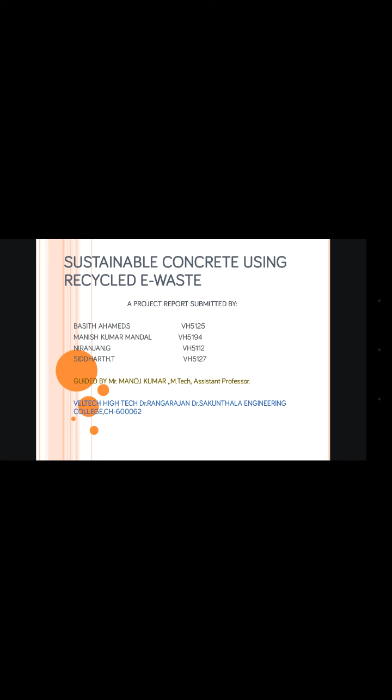E-waste is one of the most growing environmental hazards. As day by day the technology increases, the e-waste generation will also increase. So we have to find some method so that we can easily dispose this e-waste and make some good use of it. The aim of our project is to replace the sand, the fine aggregates, in the concrete with some amount of e-waste, partial replacement of e-waste.

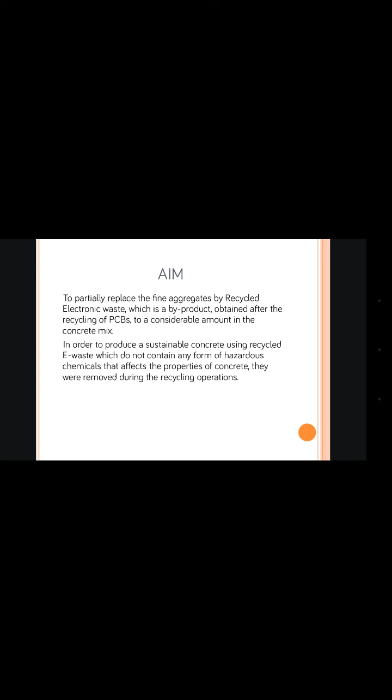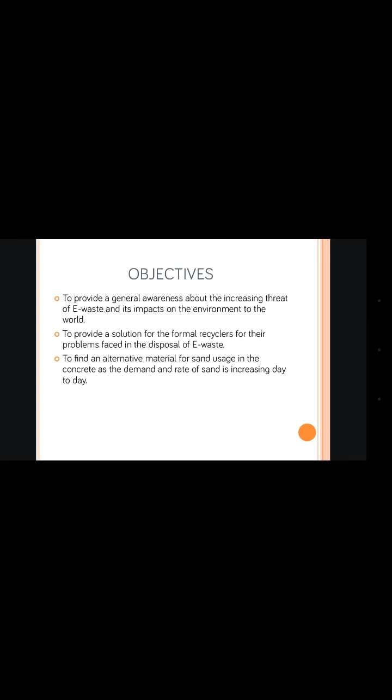The objectives of our project are to provide a general awareness about the increasing threat of e-waste, to provide a solution for the formal recyclers in the way they dispose the e-waste, and to find an alternative material for sand. This is the literature referred from various national and international journals.

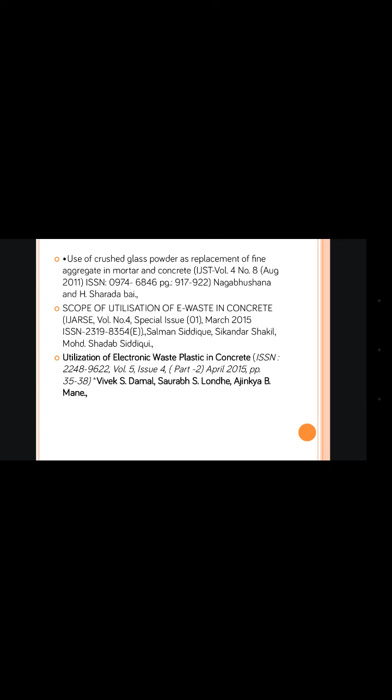Electronic waste, in short, we call e-waste. It is the general name given for any kind of discarded, surplus, obsolete, broken electrical and electronic equipment. They are comprised of electronic devices and household appliances, which we see in everyday life.

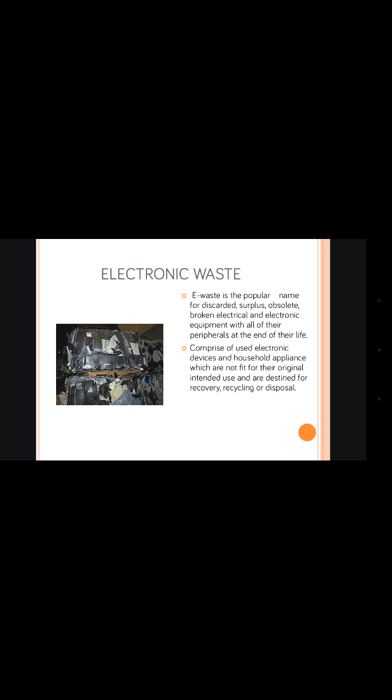The e-waste which we are about to use in this project is printed circuit boards, PCBs. They are present in each and every electronic device ranging from computers to televisions. The main components of PCBs are epoxy resins and glass fibers. But we cannot incorporate PCBs directly into the concrete. We have to make sure that all the harmful components of PCBs like cadmium and beryllium are removed before we incorporate them in concrete. So this is the composition of PCBs.

In any kind of PCBs, this is the percentage distribution of silica, alumina, calcium oxide, and certain amounts of non-ferrous and recyclable materials.

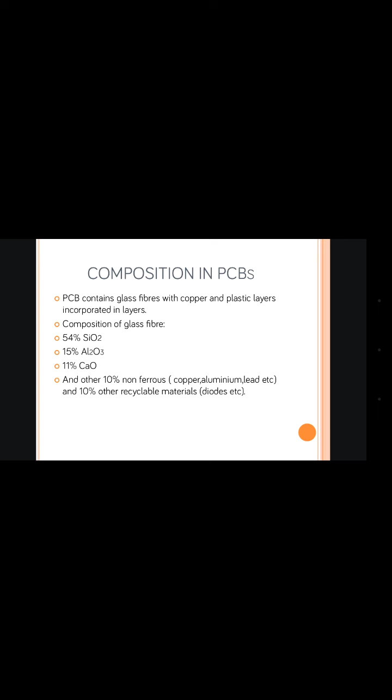So what is the need for recycling of e-waste? As I said before, we cannot directly use e-waste in the concrete because chemicals like beryllium, lead, cadmium, mercury are very hazardous and can create a lot of health impacts. And one more interesting thing is that these chemicals are non-biodegradable, meaning even if we use them in the concrete, they will pose some serious problems to the concrete in future. So they have to be removed.

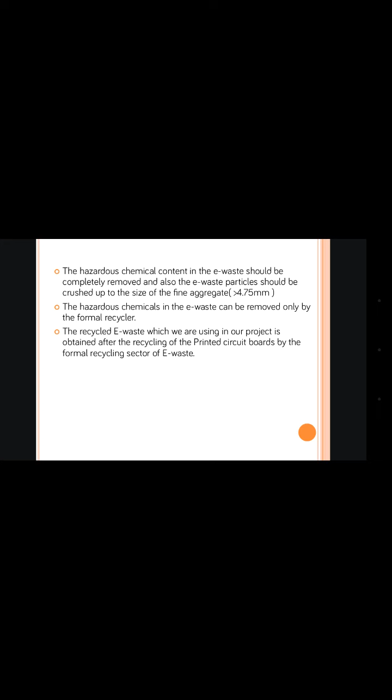The hazardous chemicals in e-waste can be removed only by a formal recycler. In our project, the e-waste which we have obtained is from a formal recycler. Formal sector of e-waste in India: formal sectors are aided and funded by the government to carry out the recycling of e-waste in a legalized manner, using all appropriate techniques and machines to shred and grind the e-waste in a desirable manner. So in our project, we sought e-waste from them.

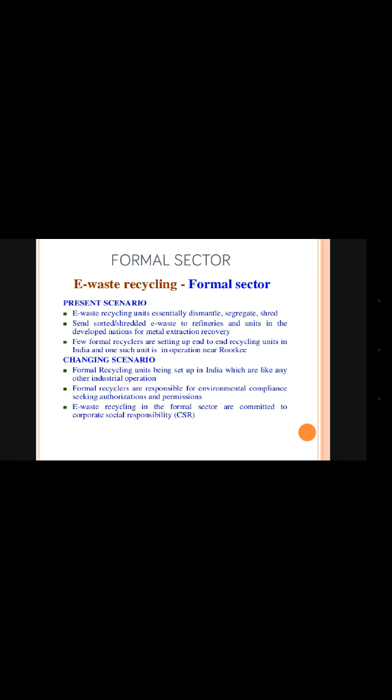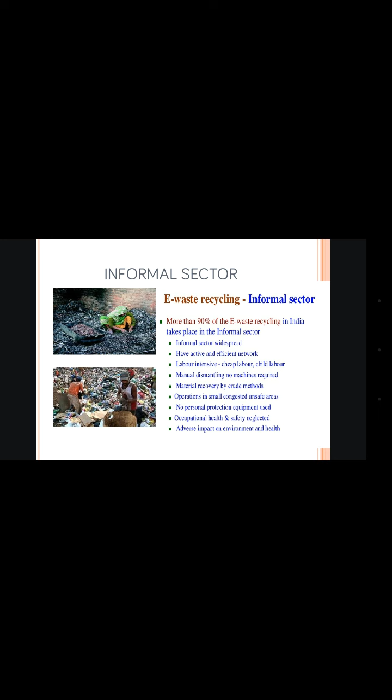On the other hand, informal sectors comprise 90% of e-waste recycling in India. There are very few formal recyclers and many informal sectors. The problem with informal sectors is that they have a lot of health and safety issues. Since recycling of e-waste involves dangerous, harmful chemicals, the workers are prone to a lot of diseases and health hazards, and it is very labor intensive. This even includes child labor, and there are a lot of legal issues in the informal sector. That's why we have not obtained e-waste from the informal sectors.

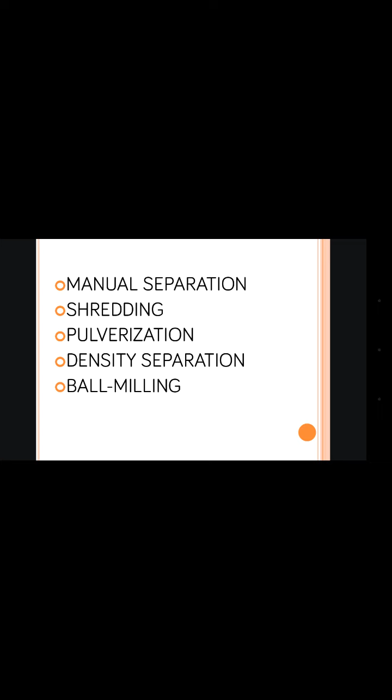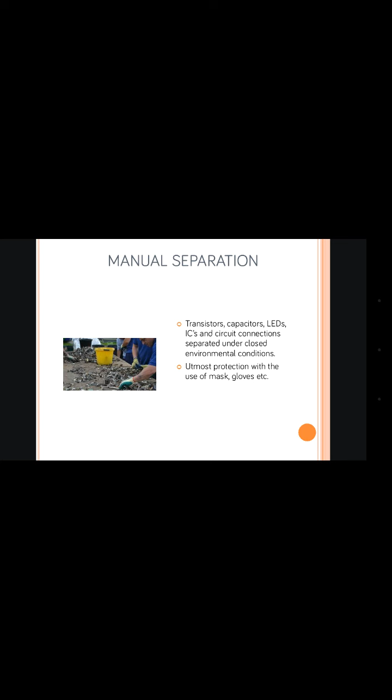Recycling process of printed circuit boards. There are 5 methods: manual separation, shredding, pulverization, density separation, and ball milling. In manual separation, using manual labor, we separate the electronic waste from other components, plastic and metal components. Then they are shredded in a shredding machine. The final output of the shredded particles is about 3 by 3 mm.

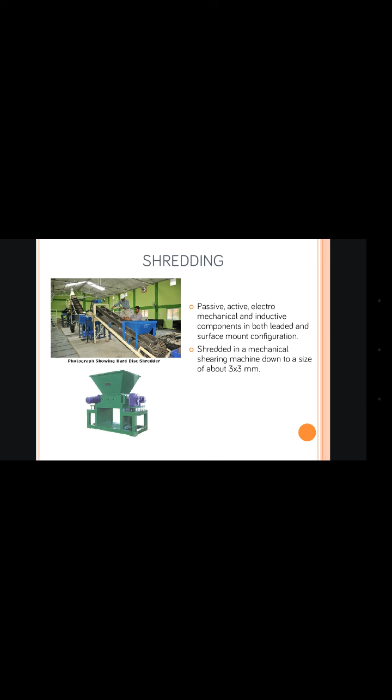The main aim of pulverization is to bring about homogeneity in e-waste. The main aim of ball milling is to activate a reaction between waste and CaO, calcium oxide, breaking down organochlorine compounds. This is done by the collision between the balls inside the ball mill.

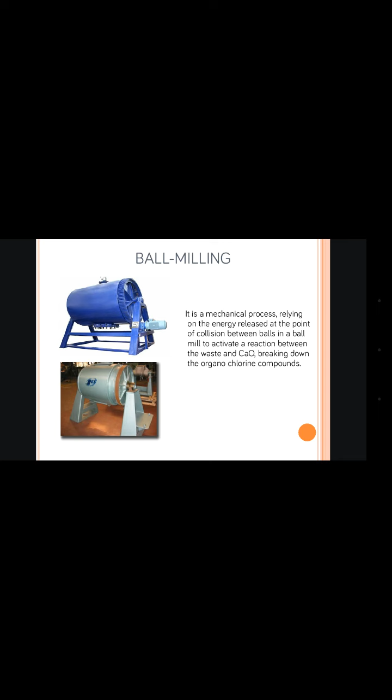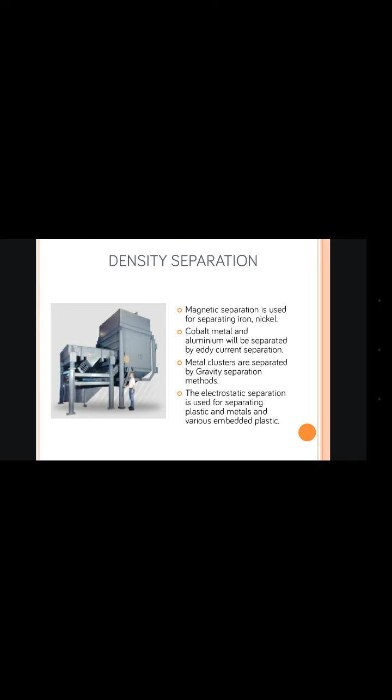Density separation is a very important phase. It is used to separate various kinds of metals and plastics. For example, magnetic separation is used to separate iron and nickel. Eddy current separation is used for cobalt, metal, and aluminium. Gravity separation is used for metal clusters, and to separate plastics from metals, we use electrostatic separation.

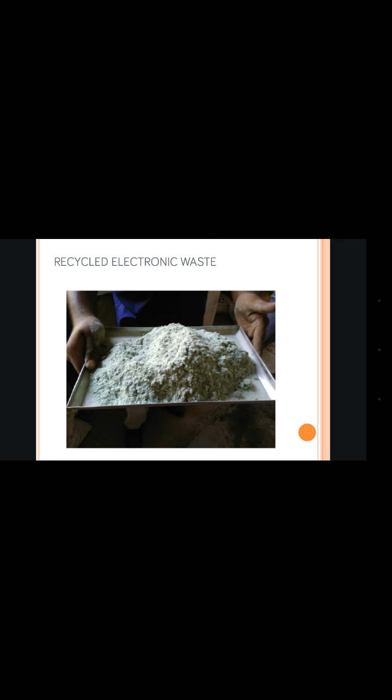So this is the final form of e-waste which we've obtained after removing all kinds of harmful and toxic materials. This is the e-waste which we are going to use in the concrete.

So what is the difference between our project and the previous projects? In previous projects, they used e-waste from informal sectors. But in our case, we use e-waste from formal sectors. The formal sectors are willing to give e-waste for free.

That's the first advantage. The second major advantage of our project is that we don't have any kind of harmful toxic substances. But in previous projects, since they collected e-waste from informal sectors, there will be toxic substances.

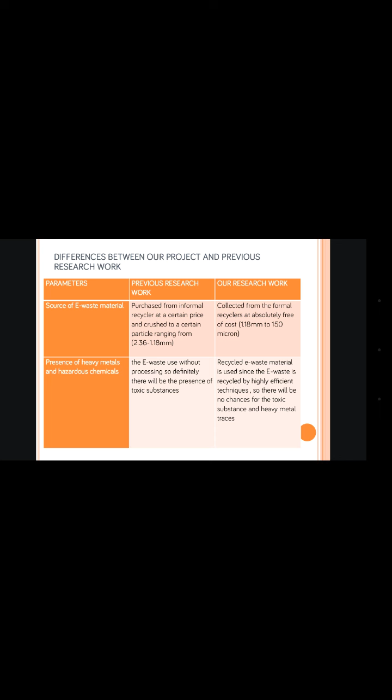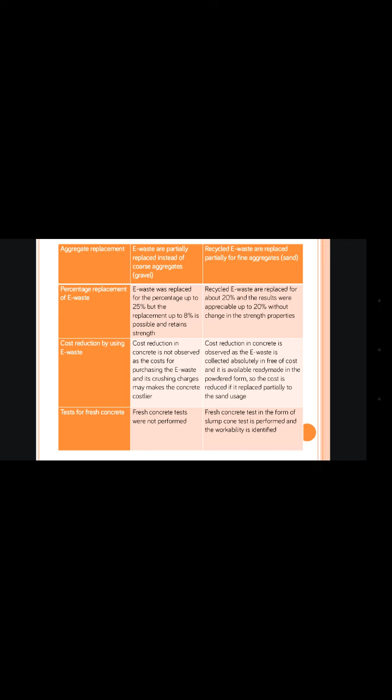Also, the previous projects' main aim was to replace coarse aggregates, gravel, with e-waste. But in our project, we took a completely different approach and tried to replace sand with e-waste. As a result, since we obtain e-waste from formal sectors, the cost is considerably reduced compared to other projects.

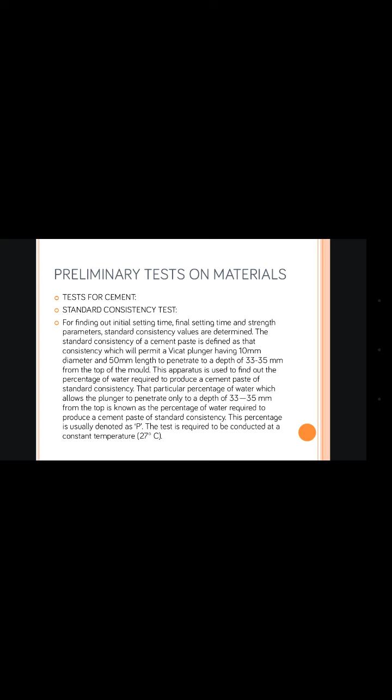To begin the concrete preparation, at any stage, the first important thing is preliminary tests on materials. As per this, the test for cement: the first one is the standard consistency test. The procedure is standard, with 33 to 35 mm depth of plunger, etc.

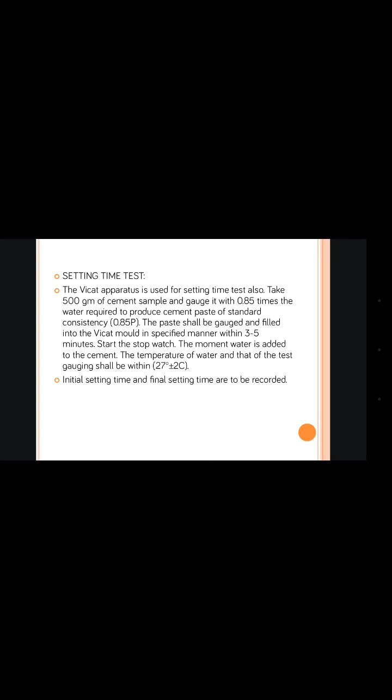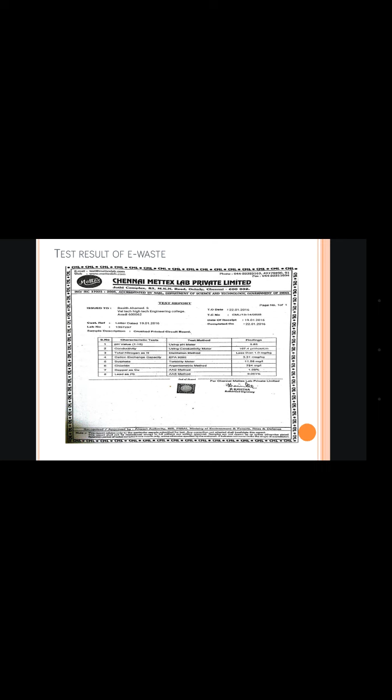This is the test result of e-waste. The e-waste which we obtained was given to Chennai Mettex Lab Private Limited, and by their lab results, it was found that our e-waste was completely free of any toxic and harmful substances. So our project can proceed. This is the main proof that states that the e-waste we use in our project is completely free from all kinds of harmful and toxic substances.

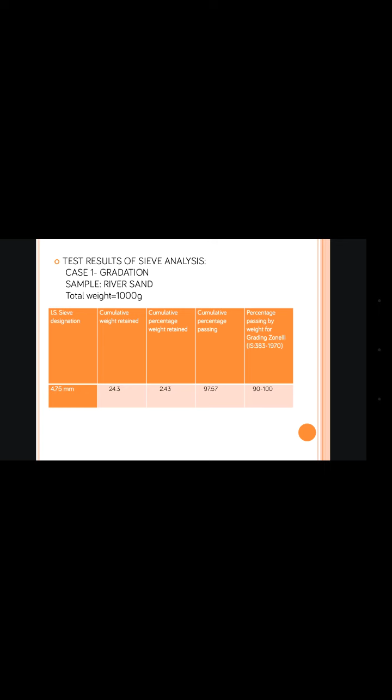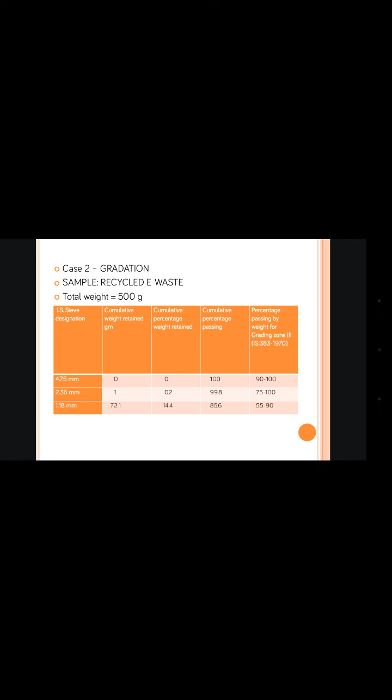The sieve analysis was taken for various cases. The first case was for river sand; the fineness modulus obtained from this is 2.9. The second case, the gradation was taken just for recycled e-waste, and the fineness modulus was about 2.06.

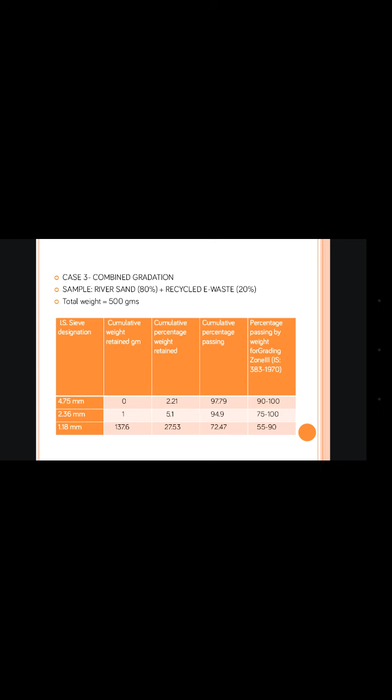The third case, we combined the gradation. We took 80% river sand and 20% recycled e-waste. The reason we took 20% recycled e-waste is that 20% is the maximum percentage of e-waste we're about to incorporate in the concrete, so if the sieve analysis for that percentage is taken, it's more than enough. The combined gradation is about 2.77.

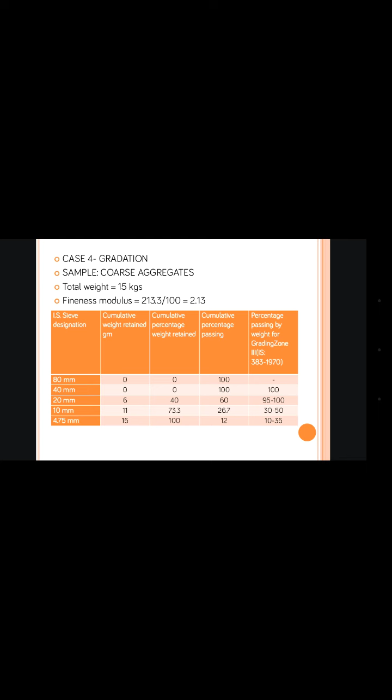Case 4, coarse aggregates, and the fineness modulus obtained was 2.13. The specific gravity tests were carried out as per IS 2386 part 3 of 1963, and the nominal specific gravity of fine aggregates used in concrete ranges from 2.4 to 2.6. The specific gravity is also determined for coarse aggregates separately, for 20 mm and 12.5 mm.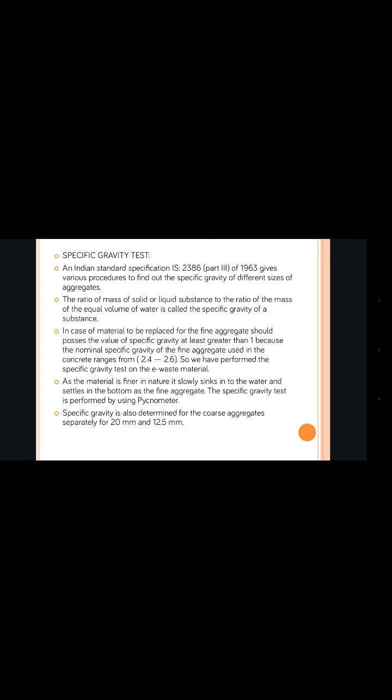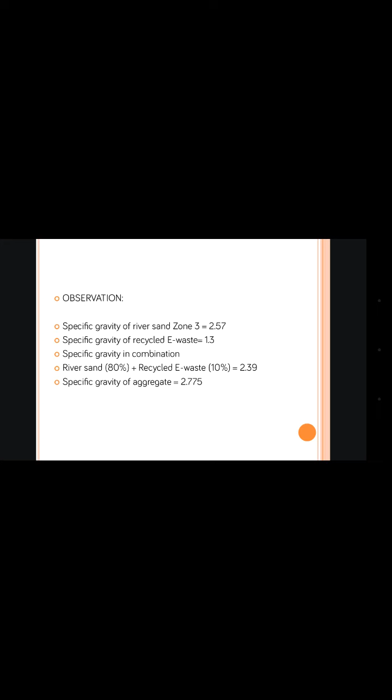As per the observations from the tests, we found the specific gravity of river sand is 2.57, noted as zone 3. Of e-waste, it's 1.3. The combination is 2.39, and the specific gravity of aggregate is 2.775.

Water absorption test is the most common test for coarse aggregates. The observation is that the combination gives about 0.8% water absorption, and water absorption in aggregate is 0.48%. The reason it's more in the combined mix is because e-waste absorbs an extra amount of water.

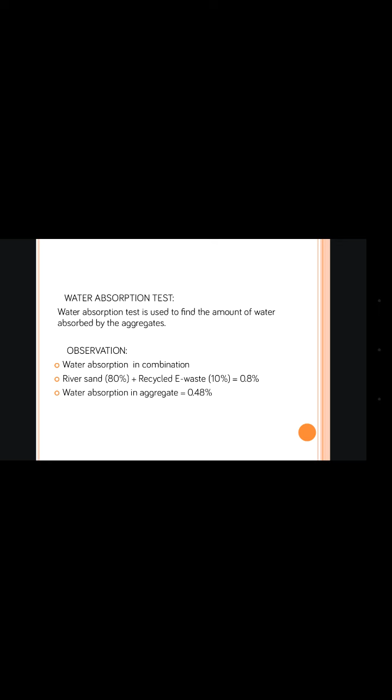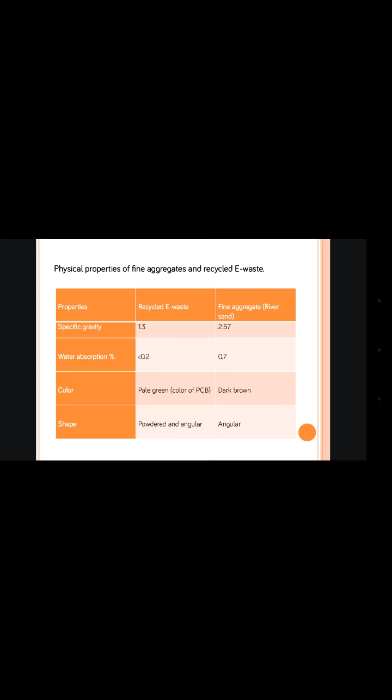The physical properties of fine aggregates and recycled e-waste: this is a comparison to show that e-waste is really compatible with river sand. If e-waste has to replace sand in the concrete, it has to be ensured that the e-waste and sand have almost the same properties so that the project work can be carried out. These are the various property comparisons in tabulated form.

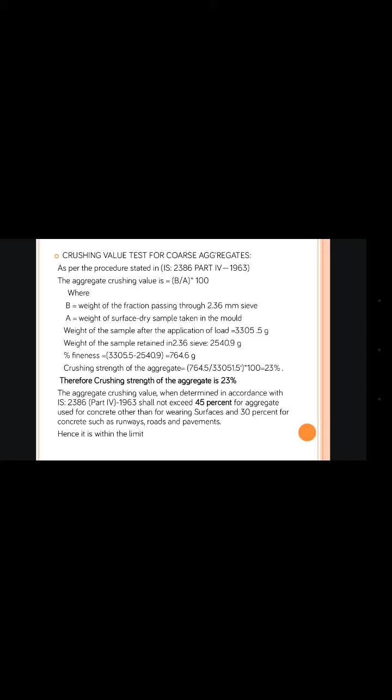Crushing value test for coarse aggregates as per IS 2386. Crushing strength of aggregates, what we found is 23%. As per IS 2386, it is clearly stated that it should not exceed 45%, so our result of 23% is within the limit. Crushing strength of the aggregate is 16.5% in this case.

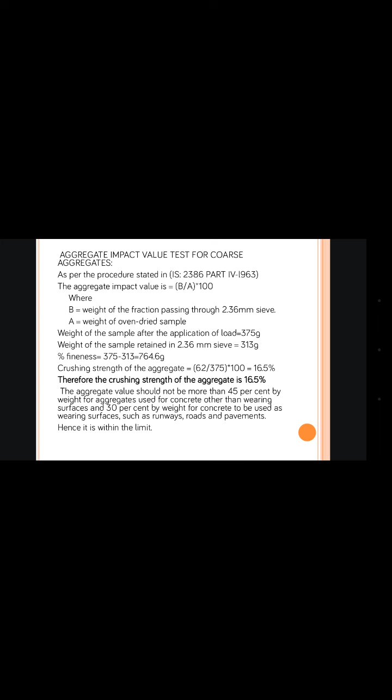This is the most important part, the mix design: manually worked out mix design for M20 concrete. The basic features: cement used is OPC 53 grade, specific gravity of cement is 3.2, water cement ratio maximum level is 0.55, with a range between 0.45 to 0.55.

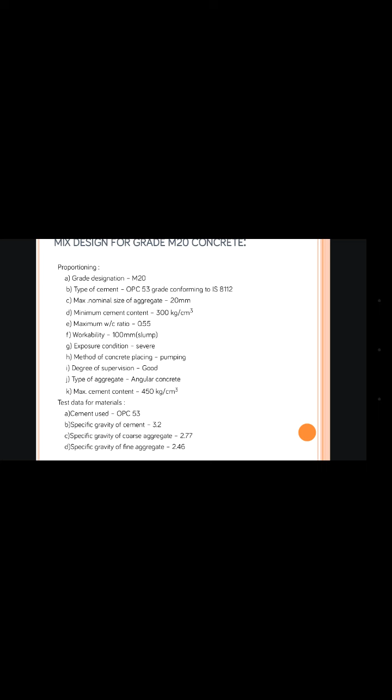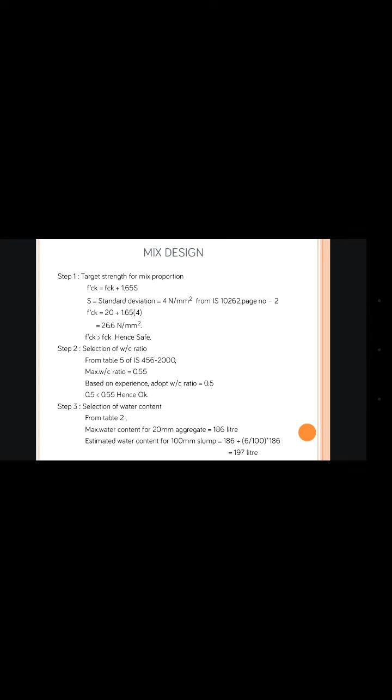The various steps: the first step is to find target strength. The second step is selection of water cement ratio. Step 3 is selection of water content from table 2. All these values which we've obtained in this mix design have been referred from standard code books.

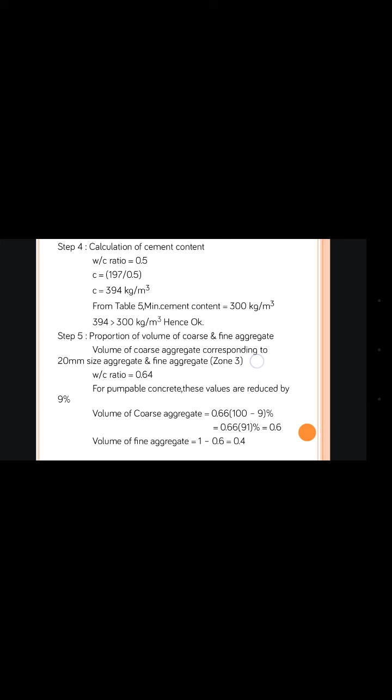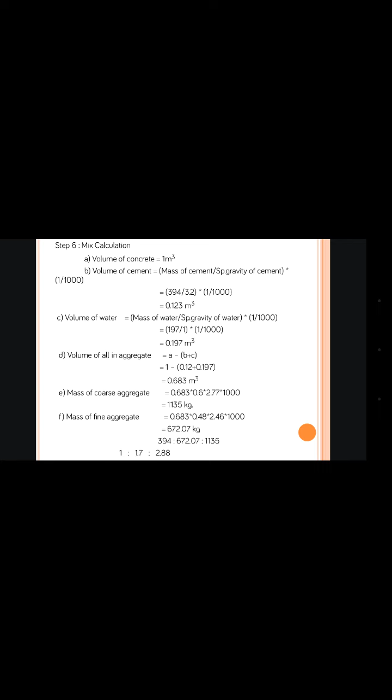Mix calculation. Finally, we arrive at the ratio required for M20 concrete, which is 1:1.7:2.88. We're going to use this mix in our concrete formation.

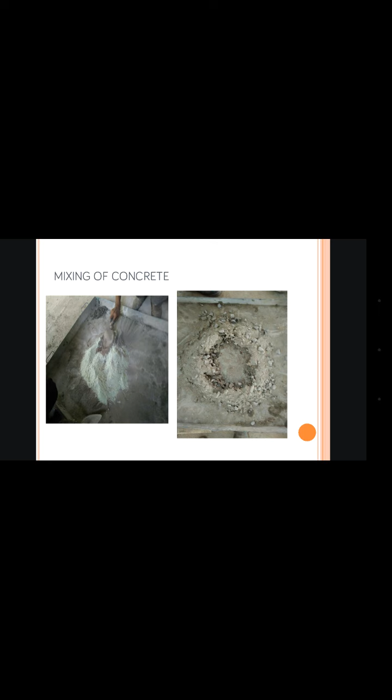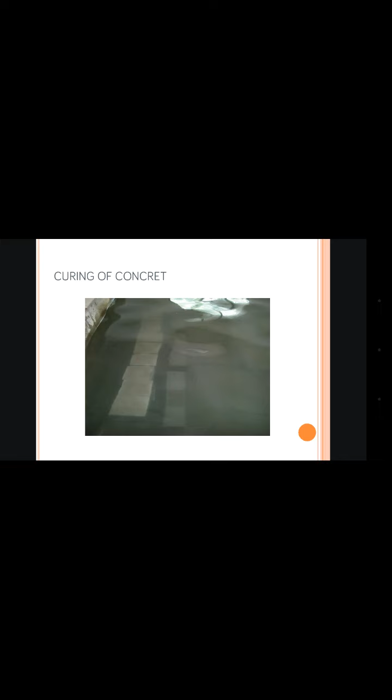After the casting of cubes, the most important test which comes now is the compressive strength test. The compression test is the most commonly conducted test on hardened concrete because it's a very easy test to perform and it's one of the most characteristic features of concrete.

In this project, we adopted replacement ratios of 5, 10, 15, 20 percent, and a standard cube, that is a nominal mix without replacement. For each replacement ratio, we casted 4 cubes: 2 cubes for 14 days curing and another 2 cubes for 28 days curing.

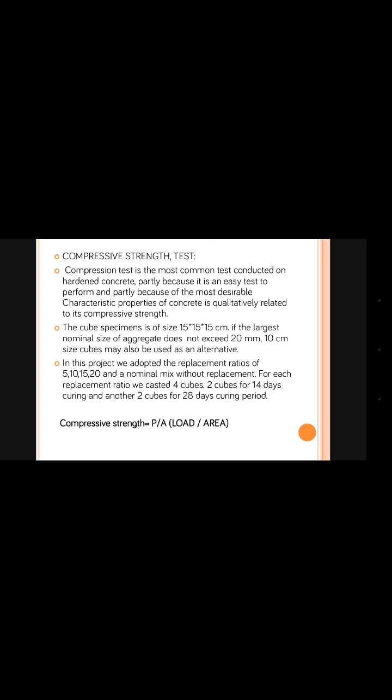So these are the details of the compressive strength test. You can see the 0% replacement is nothing but the standard cube without any kind of replacement. This tabular column shows the 14 days curing of concrete, trial 1 and trial 2, and the average. From this, we can find that as the percentage replacement of concrete increases, the average compressive strength also increases.

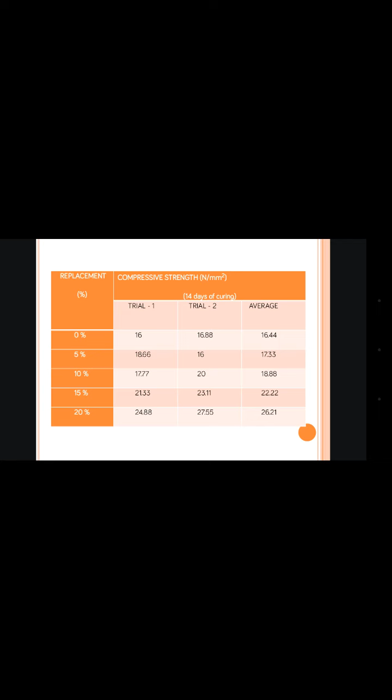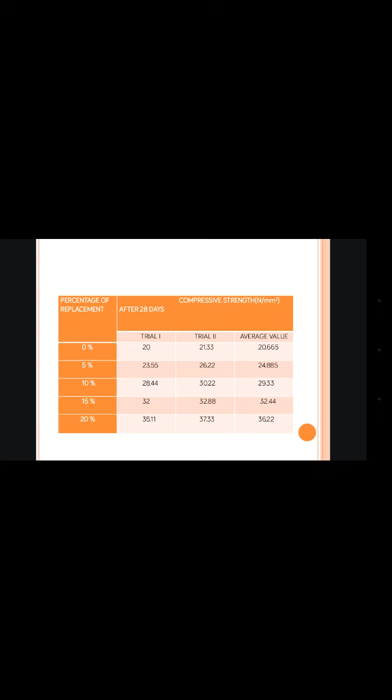And this is for 28 days compressive strength. In this case also, we find that the average compressive strength increases as we increase the percentage of e-waste incorporation in the concrete.

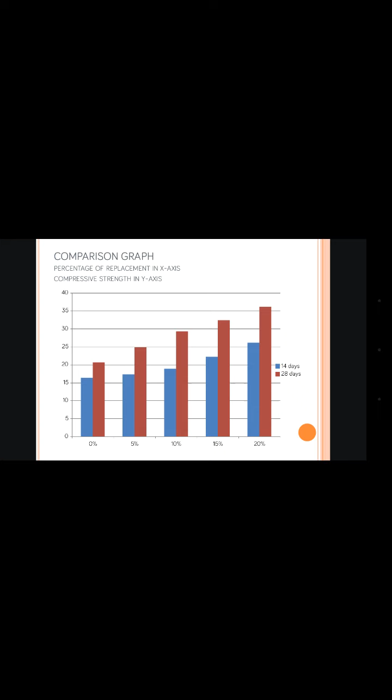Now the next test which we carried out is flexural strength on concrete beams and prisms. An alternate approach is mentioned in clause 6.2.2 of IS 456-2000, that the flexural strength can also be calculated using the relation 0.7 into root FCK.

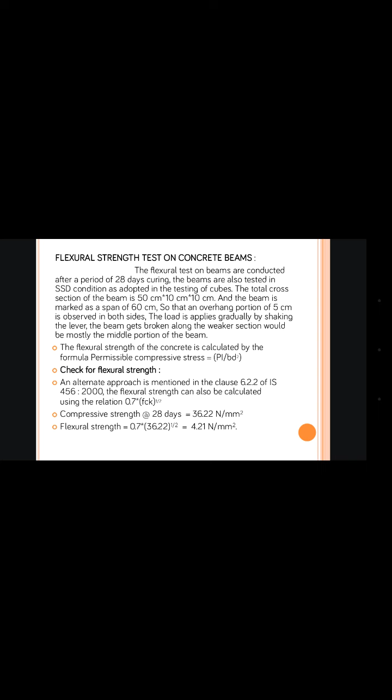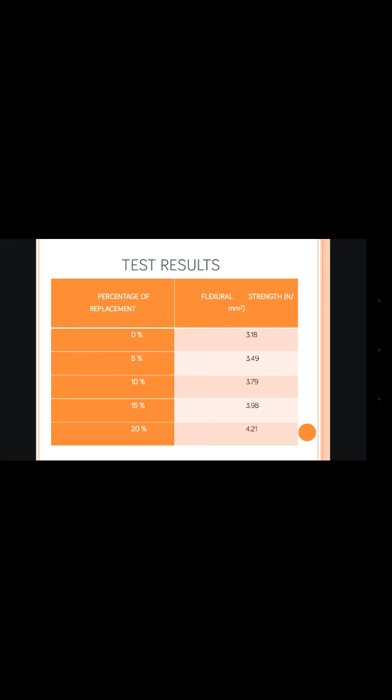The reason why we did not go above 20% is because above 20%, after referring to a lot of journals, we found that beyond 20%, the concrete begins to lose its compressive strength. So our test results, which we obtained, are in a straight line graph, a gradual rise.

So what's the conclusion, the inference? The inference is, from this test result, the optimum point of replacement of e-waste is 20%.

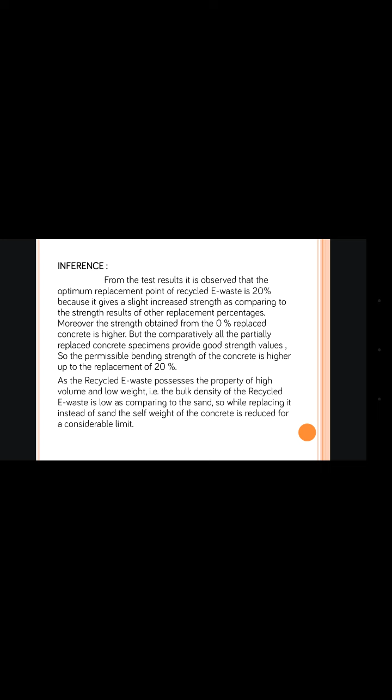So what is the potential of this kind of project in future areas? Why should it be adopted? What is the use? How can it be implemented in different forms?

The recycled e-waste, first thing, is free. So anything which you can obtain for free, and if you can use it in a good way, in incorporation in concrete mix, it's really desirable.

And also, the second thing, the cost of concrete production is very much reduced.

And for now, this kind of e-waste concrete can be used only in manhole covers, concrete pavements, culverts, etc. For now, the implementation of this in structural members can be used, but it needs more acceptance from various kinds of construction institutions.

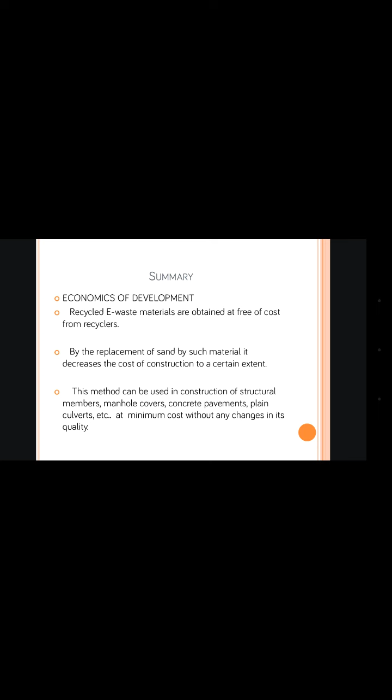The reduction of self-weight is also a major plus. The reason is because e-waste possesses the property of high volume and low weight, that is, the bulk density of e-waste is low as compared to sand. So while replacing it instead of sand, the self-weight of the concrete is reduced to a considerable limit.

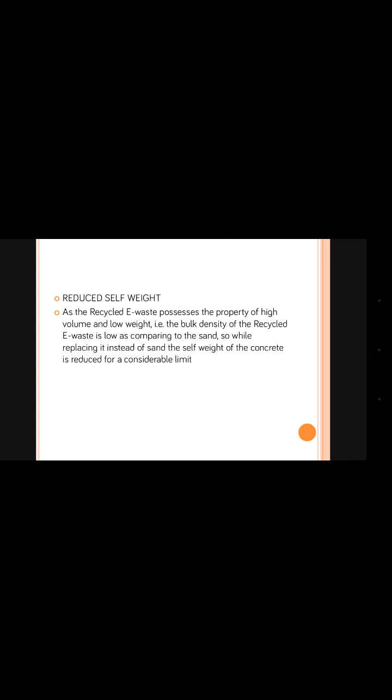So we conclude, the compressive strength of the concrete increases when e-waste is used for replacement of fine aggregates, but the optimum replacement is 20%. Beyond 20%, the concrete loses its strength and it begins to fail.

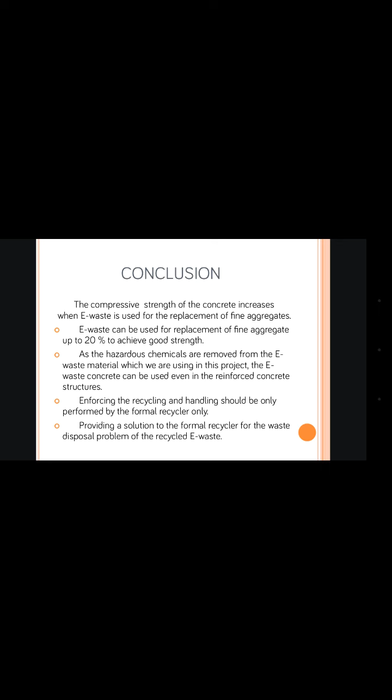The enforcing of recycling and handling should be only performed by the formal recycler. It is very much recommended that we use e-waste which is generated by formal recyclers.